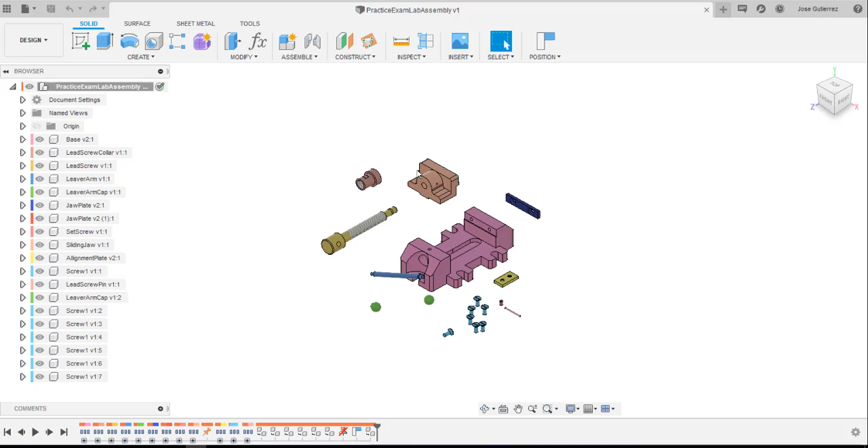So on the exam you're going to get something that looks very similar to this. It's going to be an exploded assembly, and our job will be to assemble it correctly.

If we look at the assignment, I'm not going to give you a whole lot of guidance, so you'll have to use a lot of your intuition. But I will point out specific things that really need to be met. If we take a look at the instructions, we're not given much on how it comes together, but you can at least see where everything goes. I'll give you something like a section view so you can see how the components come together, but you'll see every single component, and then I'm going to clue in on important things.

For example, this vice grip sliding jaw is going to move with the lead screw. The lead screw is going to be rotating and translating through the lead screw collar. That's going to clue us in to how this is assembled.

So let's go through this. The first thing I might want to do is take a look at stuff that is fixed. If I look back here, what I can see is anything that is threaded tightly and screwed in is probably going to be a fixed connection. So I think these plates are probably fixed.

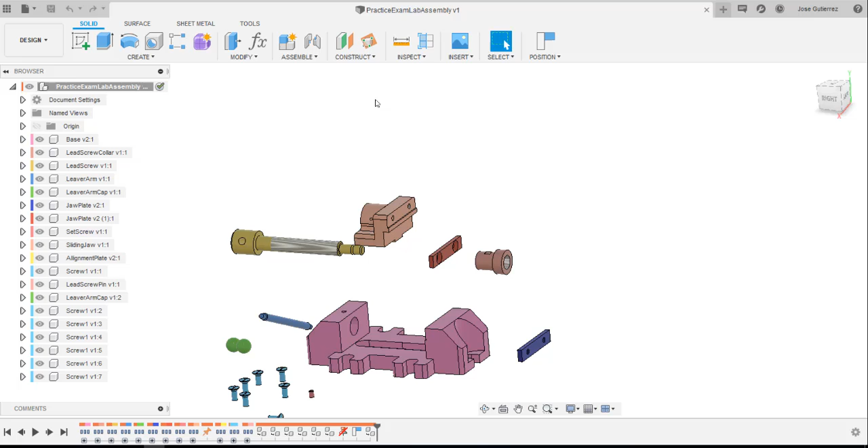So let's go ahead and do all those fixed connections first. I'm going to do J for the joint tool, but just so you know, it lives under the assembly. I just like to do J because I don't have to navigate there.

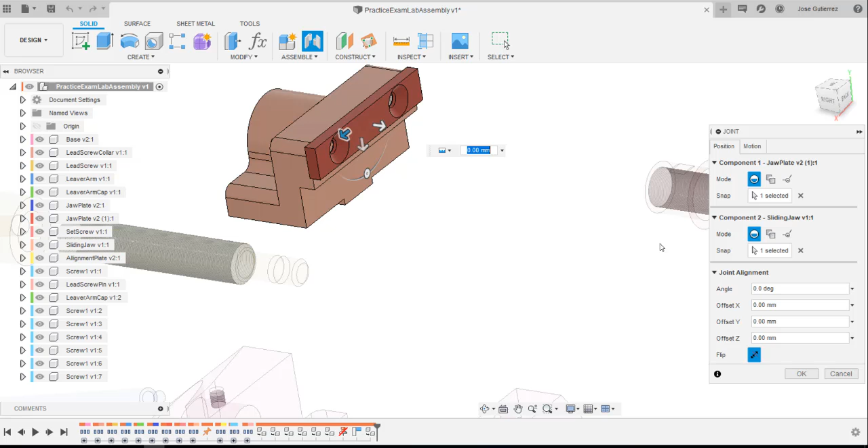Okay, I'm going to first actually just put these plates. It doesn't super much matter the order of operations here, but I'm just going to connect them rigidly to the vice jaw as they would go.

Now technically the bolt's going to make it rigid, so in theory you could do a planar constraint and then a constraint between the bolt and each component, but that's a little bit overkill. So I'm just going to go ahead and put it in as a rigid constraint because I know it's going to be.

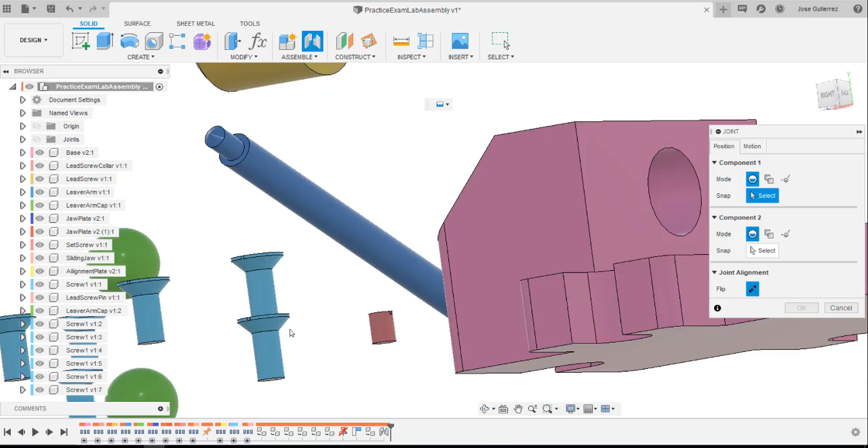I'm going to take this, and in my joint tool, I'm going to actually look at this counterbore or countersink. I'm going to put that right flush with the bottom of the other part of the countersink. Uh-oh, it's going the wrong direction. That's okay, I can just click the flip option.

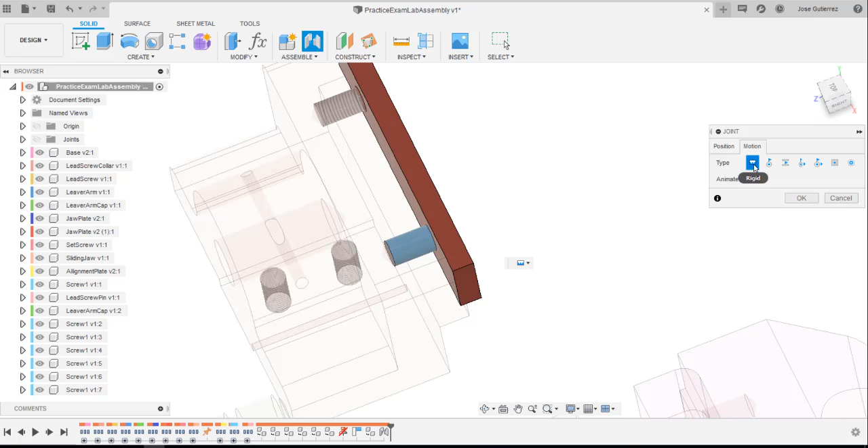Just so you know, the motion I've been doing is rigid. The animation will give you this kind of angry vibrating back and forth motion. Okay, and so that's how I would do it.

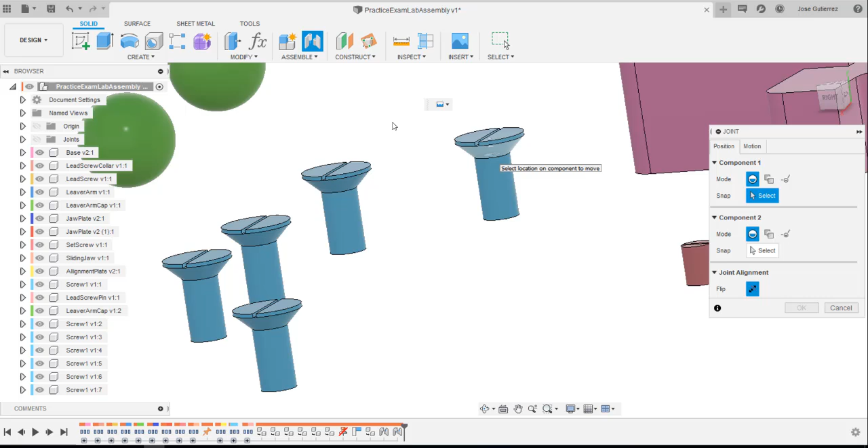I'm going to just continue to go and add all of my joints like so. I'll go ahead and make a joint in between here and here. Feel free to skip ahead in the video if you're like, okay, I understand the screws, but I'll just go ahead and add them all in.

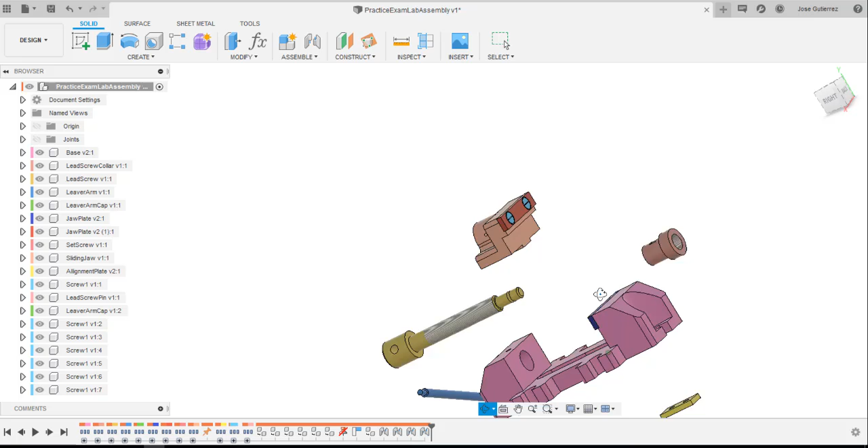That one I didn't have to flip - that's kind of nice. Make another joint between this plate and my base. Oh, and actually, before I go any further, I was told I should ground the base so it can't move. And I don't want it to move.

So I'm going to go ahead and click on the base. I don't want to lose any points, so I make sure I ground that. You should see a little pin next to it, and I can't drag it around, whereas everything else I can drag around. Okay, so I'm going to go ahead and continue on with my joints of my screws.

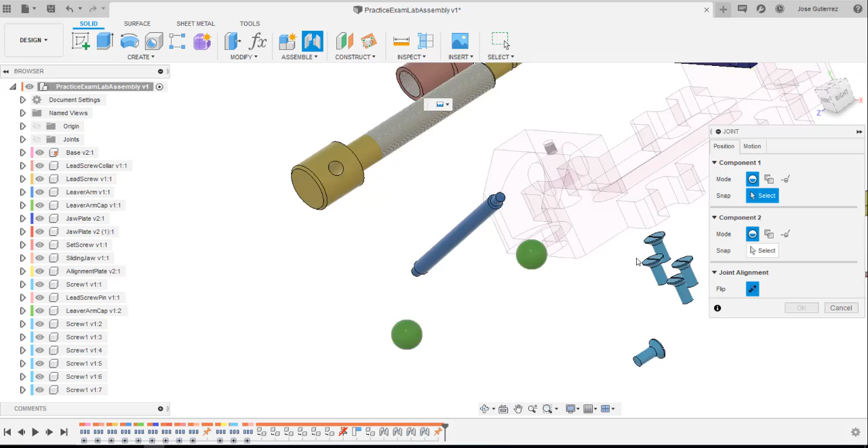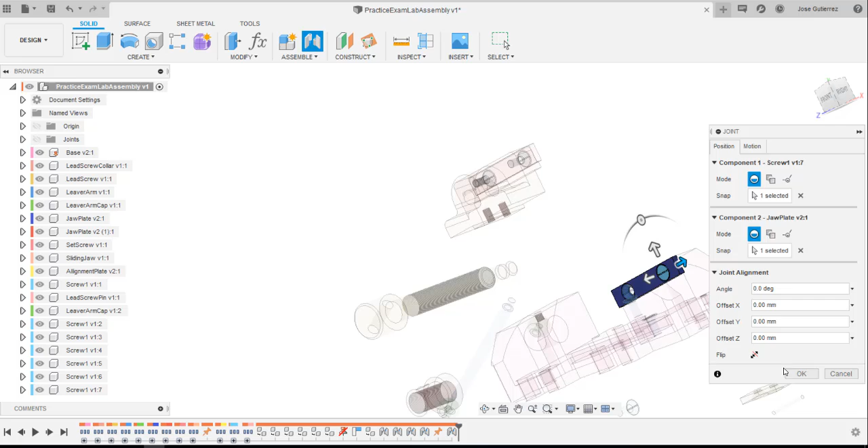Flip that one. Okay, gonna join this screw. Flip that one. Okay, I've also got this little plate right here.

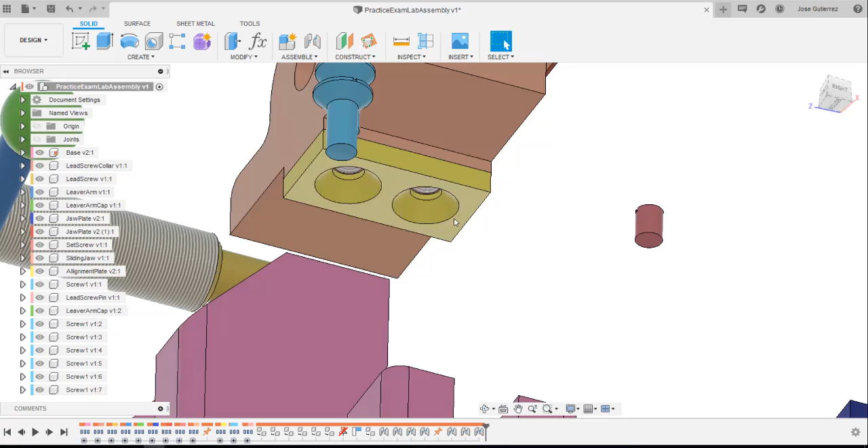In the section view, I can see that it goes to the sliding jaw. I want to make sure my countersink is facing down so that when I put my screws in, it's going to go correctly.

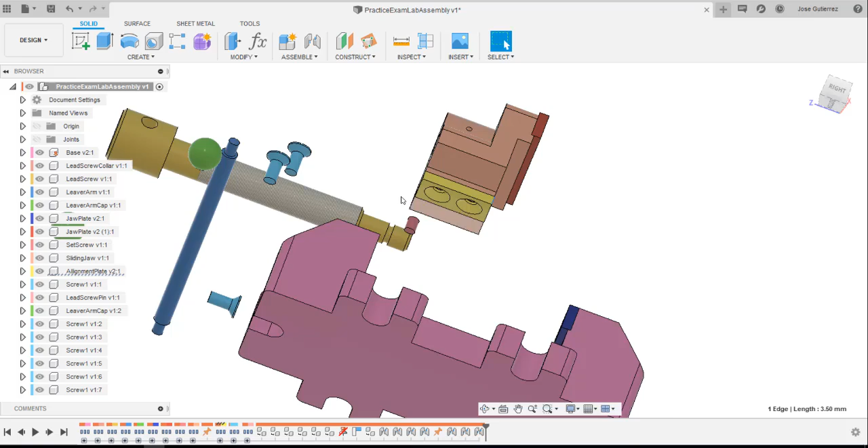Notice that this has actually been modeled with some clearance, some allowance. That is because this is a fixed fastener application. So you would want to control the tolerance of this threaded hole with a projected tolerance through the depth of this part because this is a fixed fastener application. So that gap is by design.

Okay, so I'm going to go ahead and join this here. You can choose that joint origin, that's just as fine too. Flip.

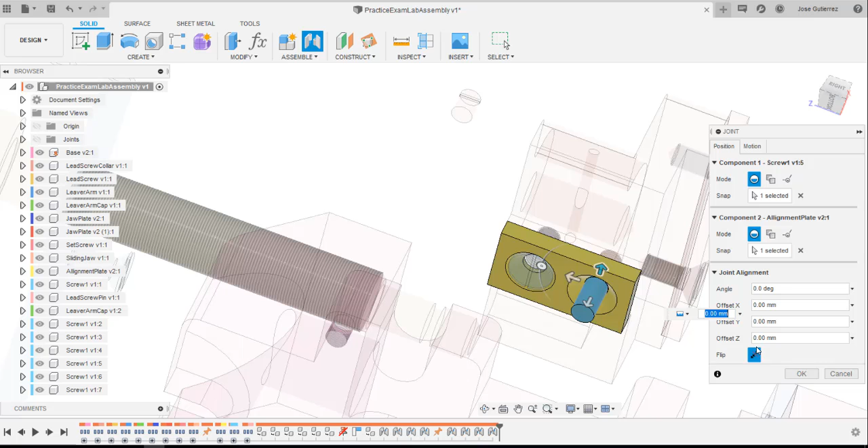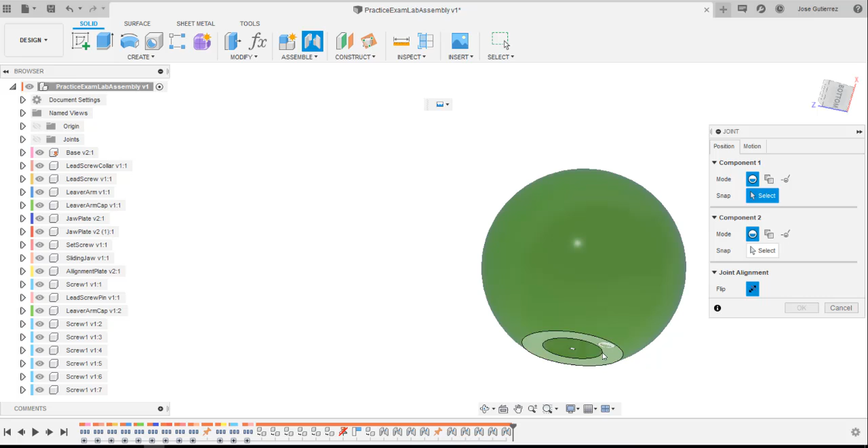Okay, I saw that these balls are going to join to the end cap, so I'm going to hold control. If I hover over that inner surface of the cylinder and hold control, I can select that point. If I don't, I won't get that point, I'll just get the origin. So hover over the surface, hold control, and then I can get that point. I know that's going to go right there.

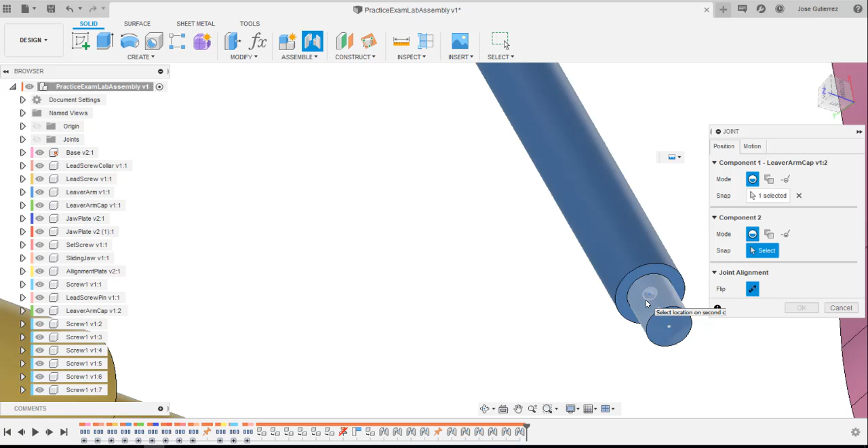That looks nice. I'll repeat that, holding control so I can select that joint origin. Oh, wrong direction, I better flip it. So if I click flip, I can flip that.

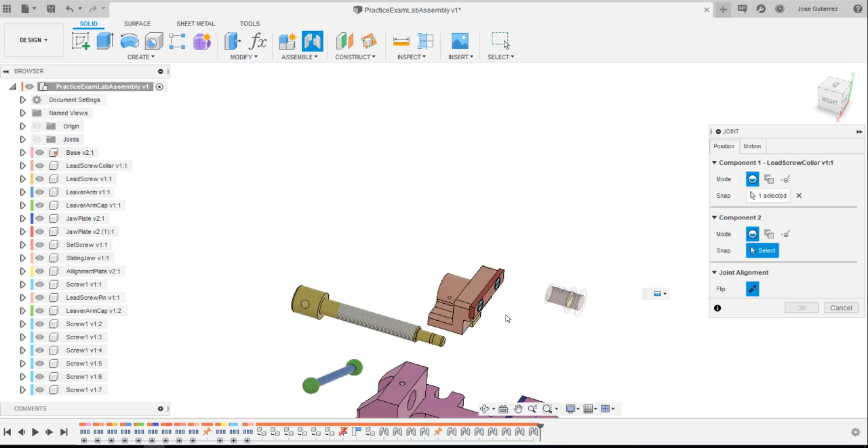Okay, and then I've got a couple more fixed connections. I know that there's a joint between here and my base.

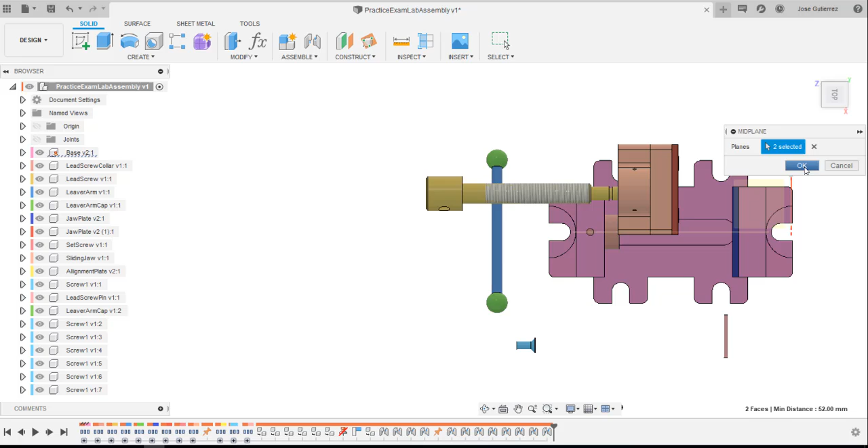I'm actually going to make a construction plane, a mid plane between this face and the corresponding face on the other side. So that mid plane is bisecting my model, because my origin was shifted.

Okay, so I hide my origin. I've actually been hiding my joints because there are so many of them, but you may want to toggle them on and off as needed for clarity. So I'm going to hide them for now.

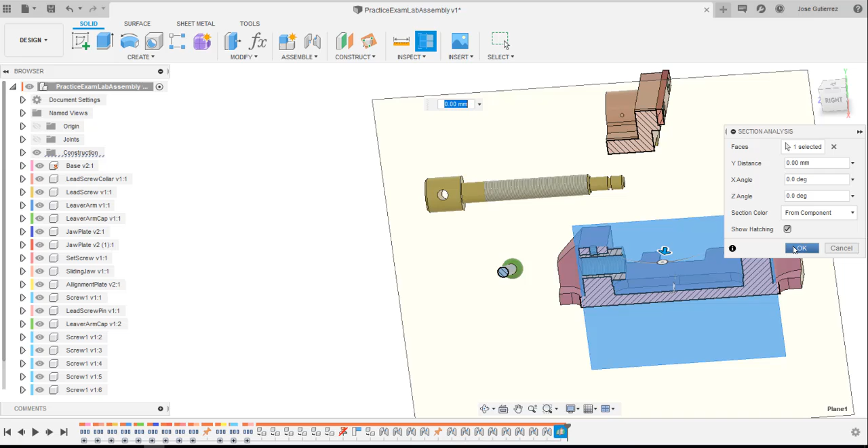I'm going to do a section view, and I'm going to use that construction plane that I just made. And then I'll go ahead and hide my construction. Section views are really helpful for doing these assemblies.

The reason I'm doing it is because I want this threaded hole for the set screw to line up perfectly with that flat part of my collar, and it does. So I'm in good shape here.

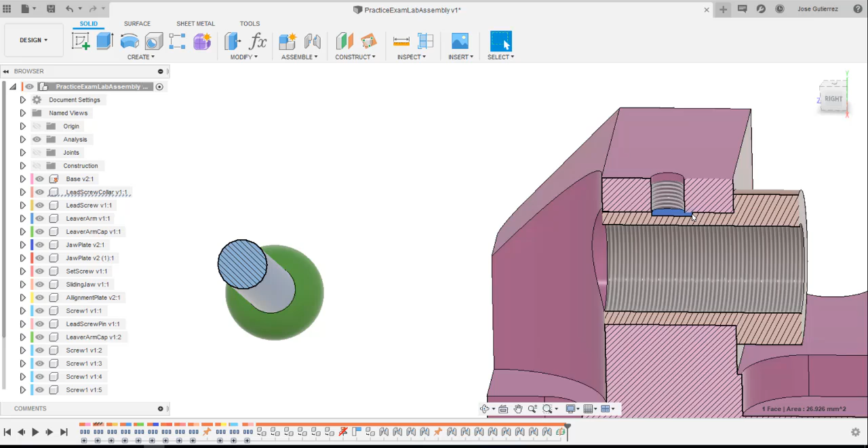But if it didn't, I might have to rotate this joint origin so that it does line up nicely. Okay, so that looks good. I'm going to turn off my analysis, hide my analysis. I'm going to now join that set screw.

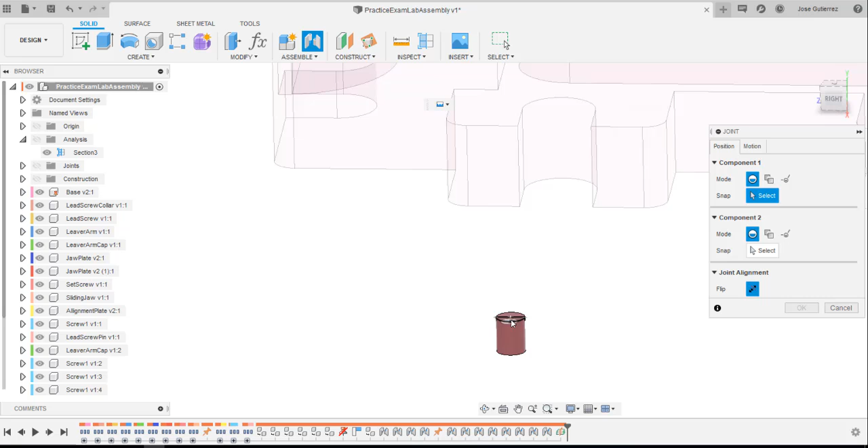So I'm going to join, and I'm actually going to put it all the way into the top right here. Okay, let's just turn back on the analysis and make sure we don't get a conflict. Nope, actually I've got a nice flush face right there. That's great.

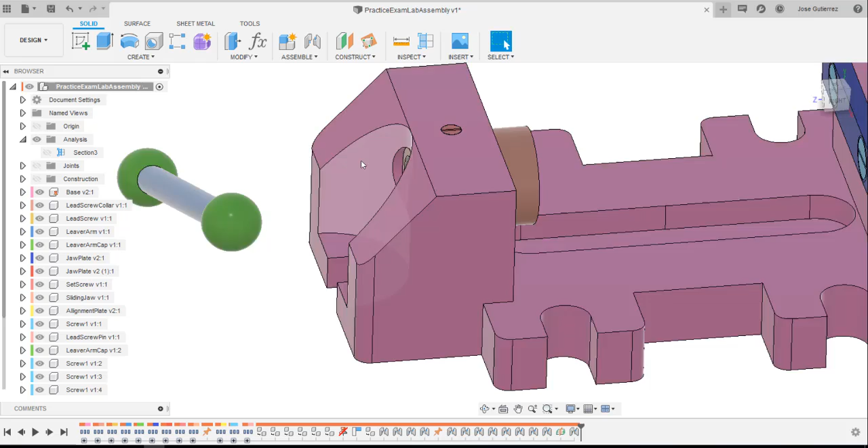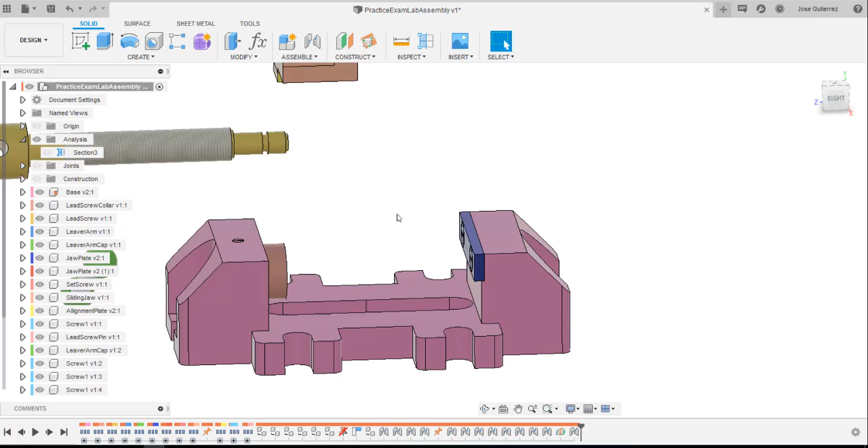Okay, turn off my section view for now. And I've actually finished all of the fixed joints, at least the obvious fixed joints for now. You'll see I don't see any more threaded holes, but looks like there's an extra screw in this assembly. I accidentally put in one too many screws when I was inserting the components, so I apologize about that. I won't give you any extra on the exam, so everything should have a place for the exam.

Okay, so the next thing I need to do is start to do the parts of the assembly that are not going to be a rigid joint. I see that my lead screw is free to slide and rotate. That's going to key me in that the joint origin I'm going to want here is cylindrical.

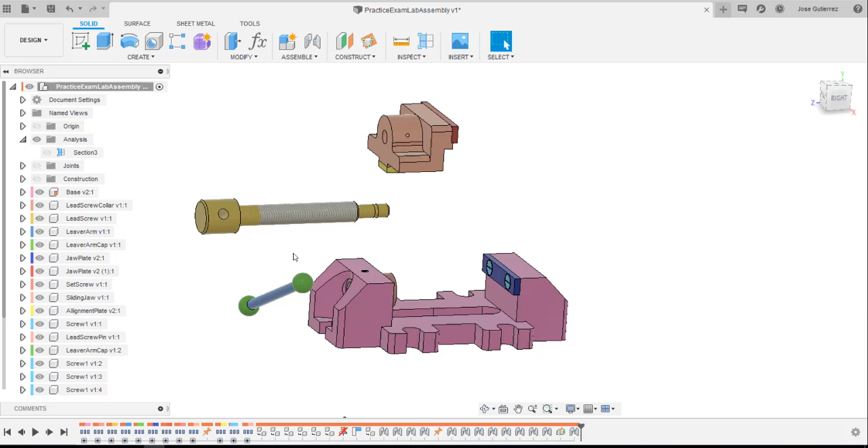So J for my joint. Doesn't really matter the order, but I'm going to do the threads, the male threads of my lead screw, into the female threads of the collar. And so I insert that. Now it's showing the wrong motion.

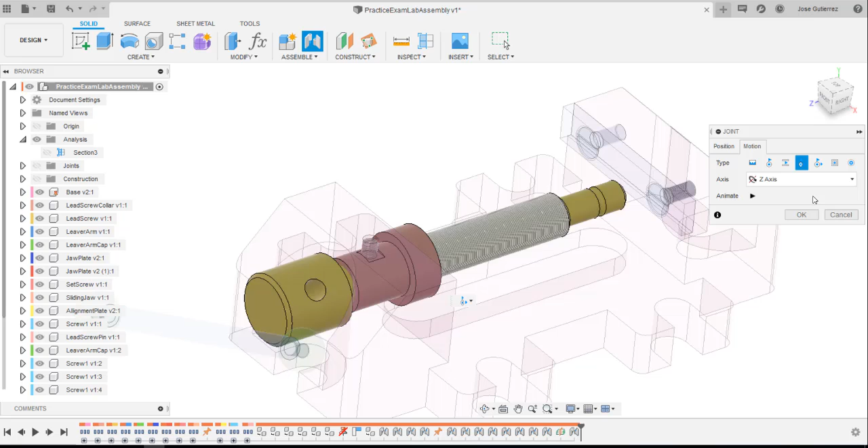So I need to go to motion, and it's not revolute, it's not slider, it's cylindrical. Okay, so that looks good. So now it's free to rotate and slide in the collar.

And then I've got to actually decide how I'm going to join the sliding jaw to this lead screw. And it's not going to be fixed. If you think about fixed, this wouldn't be able to spin without this also spinning. This should actually be free to rotate in it.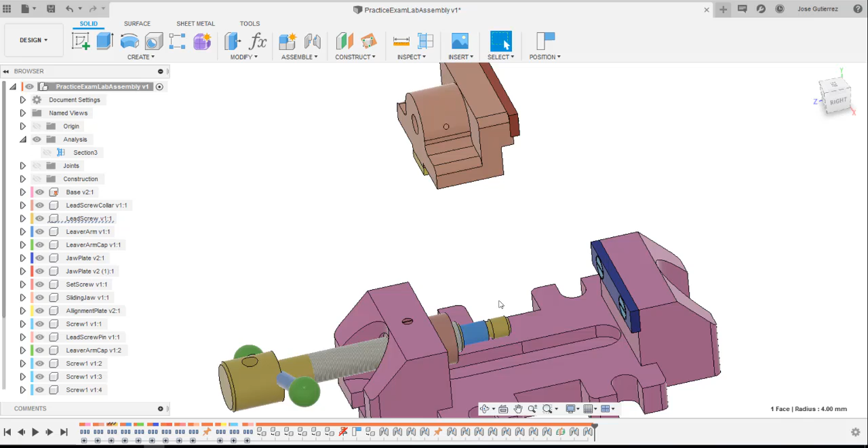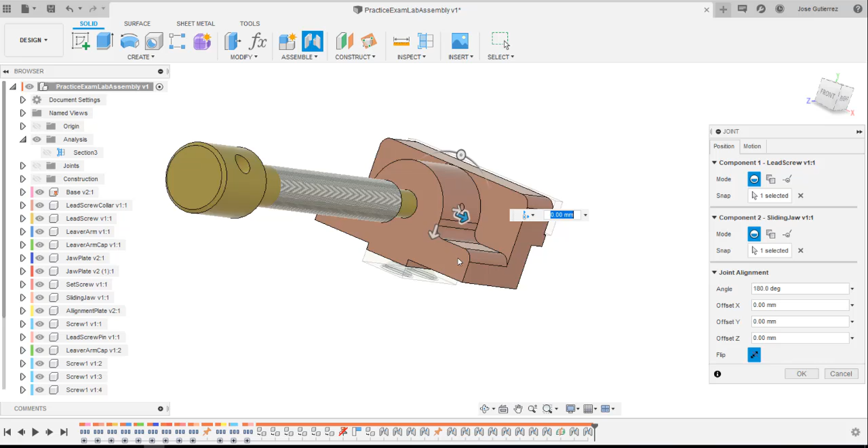So I'm going to go ahead and join, and let's do the end of the lead screw, and let's put it as deep as we can into the hole. So holding control so I can select that joint origin. Okay, and then I'll press OK.

Actually, I'm going to reverse the order. So the first one is here because I want to move it to the lead screw. If you select that one first, it'll move it to there.

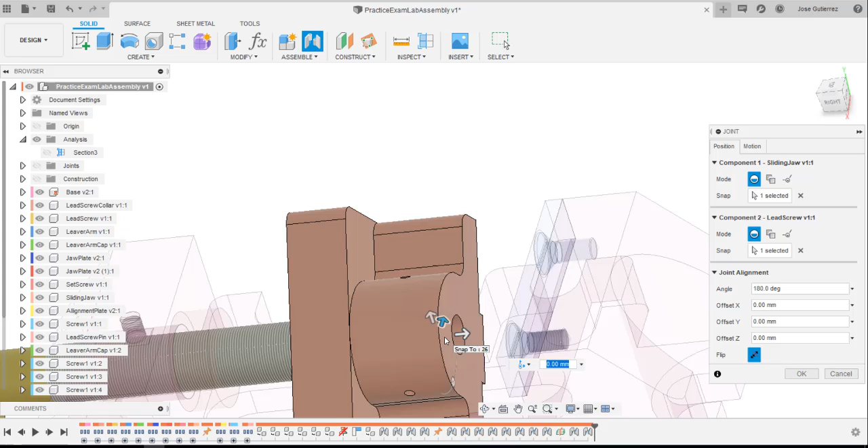I'm going to flip the direction, but then I'm going to change the motion to a revolute. Okay, so now it's free to spin. I'm also going to use my section analysis, so I'm going to turn that on before I move on with this joint.

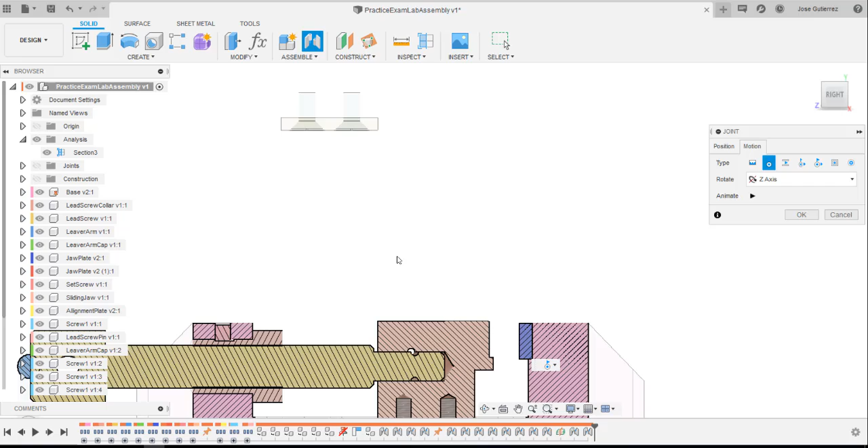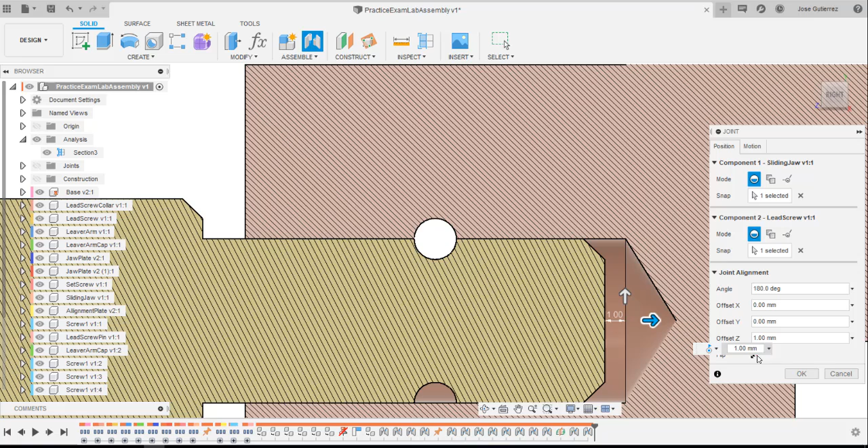What I noticed when I turned on my section analysis is that the hole for the pin that's going to go through here, they don't match, and it needs to match. So what I'm going to do is move my joint origin, so I can just drag it into place. And now they're aligning nicely. Okay, so now my revolute joint looks good.

Turn back off my section analysis. And what I notice is as I spin this, my sliding jaw is rotating, and that's because I haven't fully constrained it yet. There's actually another constraint: this face should not be lifting off of that face.

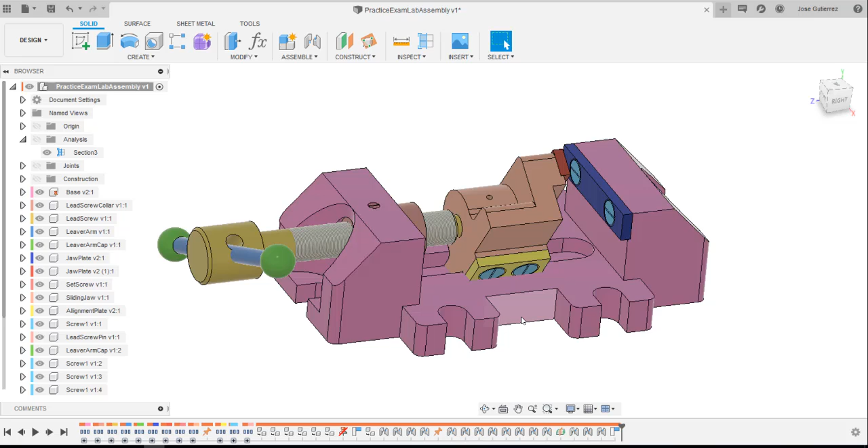So I need to apply a constraint, so I'm going to do joint. If I look at the motions, it's not rigid because it needs to slide back and forth. It's not revolute. Potentially you could use slider, so I could slide this in there.

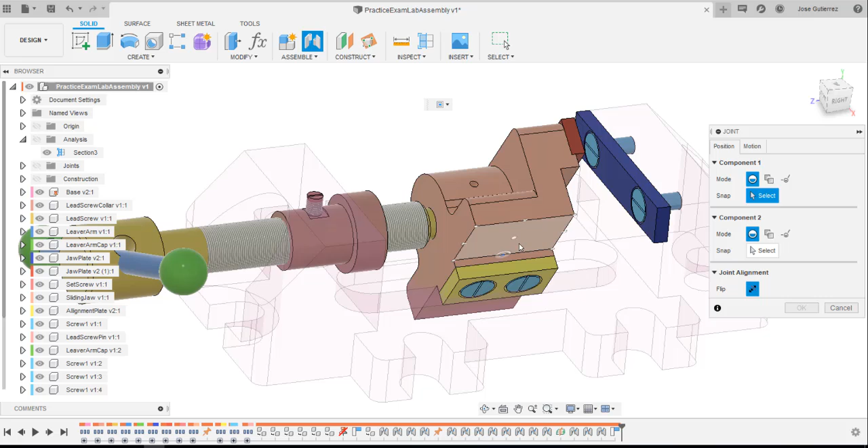I'm actually just going to go ahead and do planar, and I'm going to select this face. It's going to want an origin, so you have to select, hover and select an origin. It's kind of arbitrary, but we're choosing planar as our motion. And so now, as I spin this, it's not allowed to move off that face.

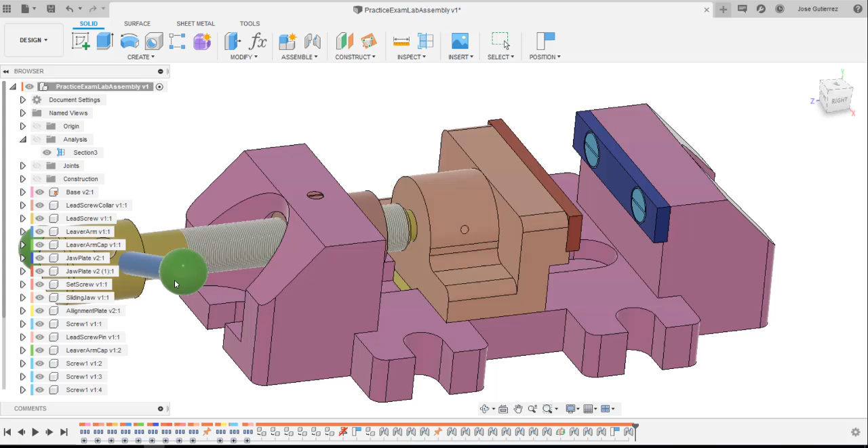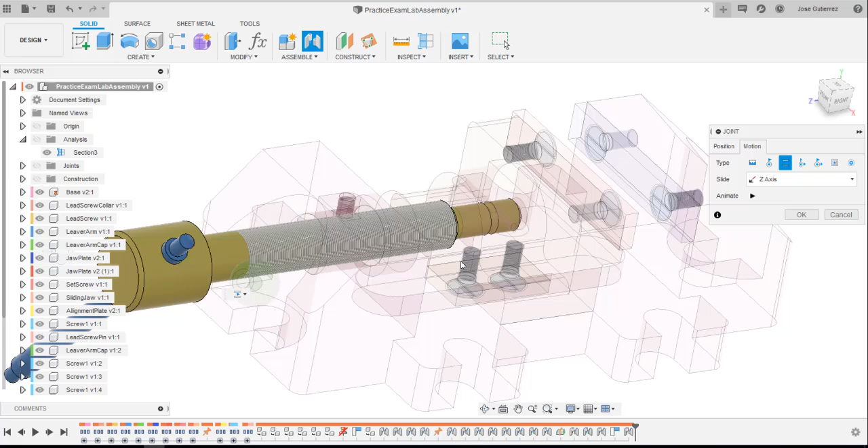Do some more joints, and I'm going to go ahead and join this shaft in here. I could do cylindrical, but I'm just going to do slider. Technically cylindrical would work, but I'm just going to make it a little bit simpler on my assembly. Sliding will get the same effect here. So now I can slide that back and forth.

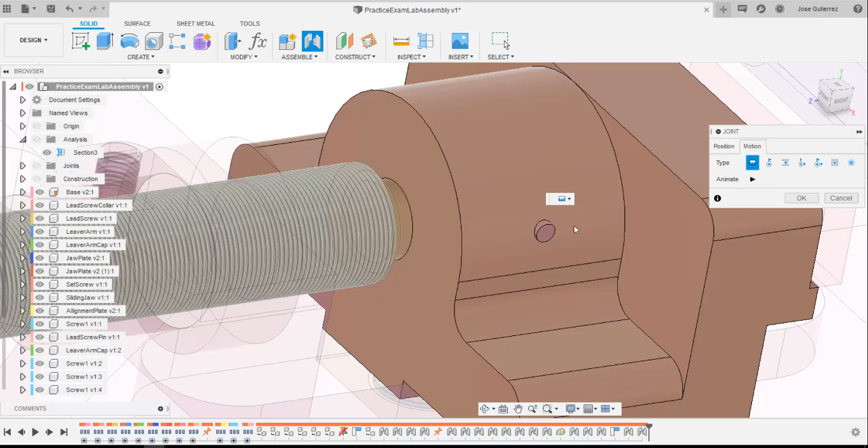And the very last thing I need is this lead screw pin here. So I'm going to join that to the midpoint right there. I held control to get that. This might be a press fit. Slider would work, and I would accept slider, but I'm just going to go ahead and go rigid because that's just going to be a press fit.

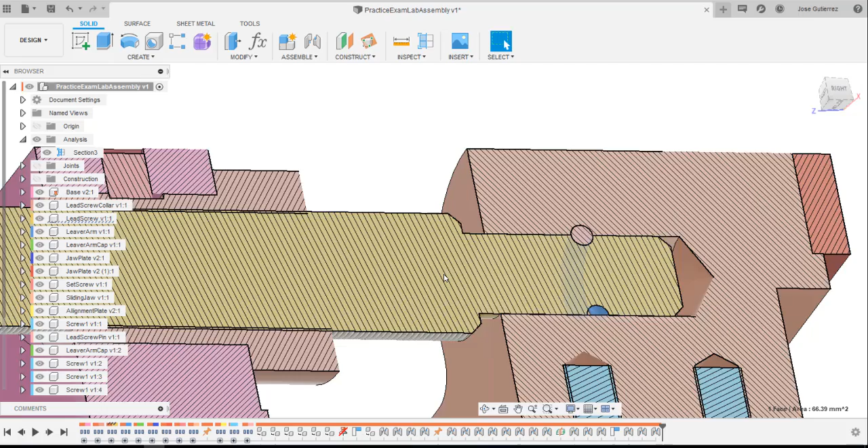So if I look back on my section analysis, what that is doing is it's going to allow this lead screw to spin, and this groove is going to hold it in place so that the sliding jaw has to move back and forth, advance back and forth with the advancement of the lead screw. So kind of a clever mechanism there.

Okay, all right. Everything is assembled and joined, except for this screw. So sorry about that, but it looks like we've added all of our joints. What we haven't added is that this can have a conflict here. We don't like those conflicts.

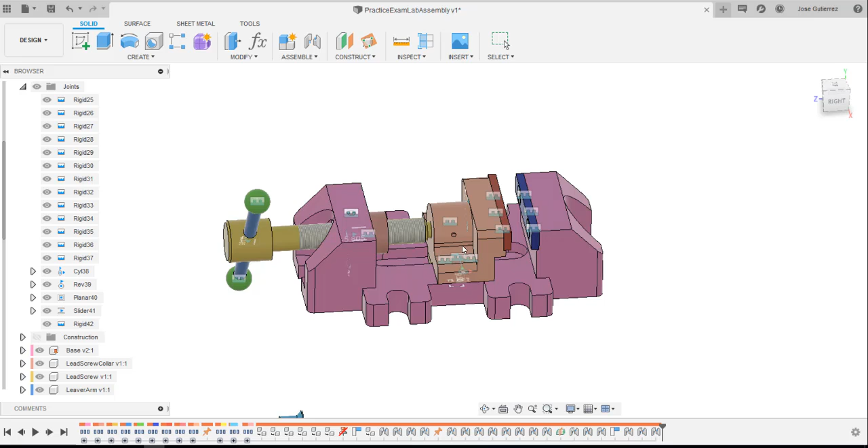So I'm going to go back, and we saw that we are also supposed to do something where our model functions mechanically like it would in real life. So we know that the lead screw should translate 0.5 millimeters for every 360 degrees, or every full revolution the lead screw makes. So let's go ahead and add that in right now as an assembly, and that's going to be a motion link.

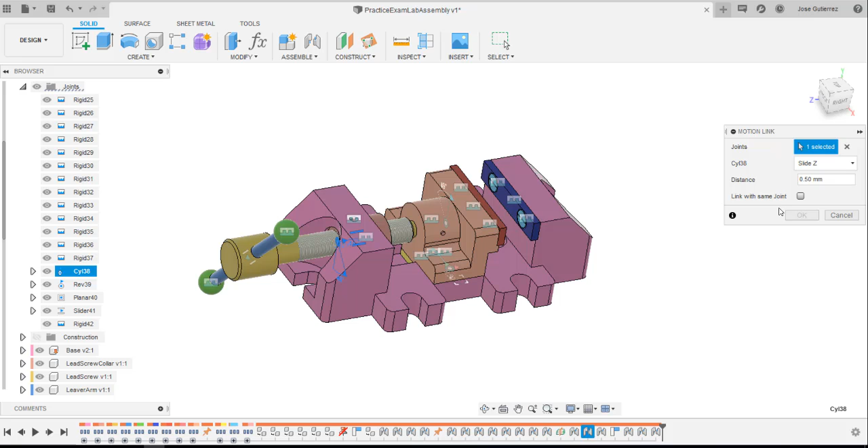The link could be between this cylindrical joint, and I could actually do the same joint. So it's going to go half a millimeter, and I had to type in 0.5 for every 360 degrees it rotates. Now I'm going to drive this joint.

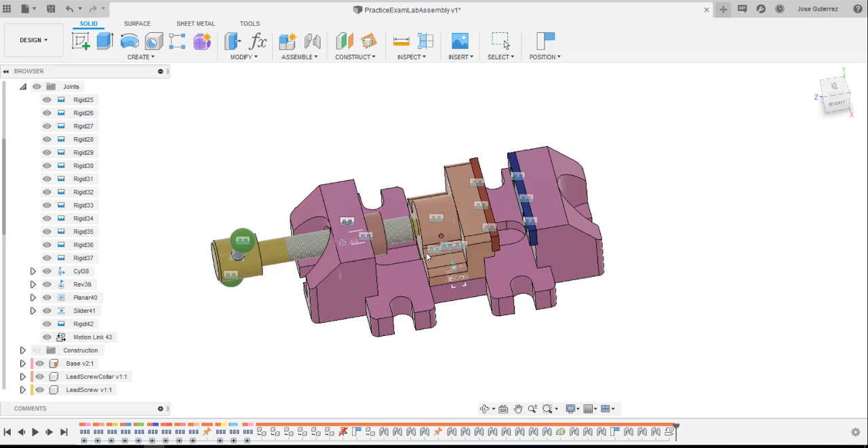One thing you'll notice here is like when I added that, I'm not actually able to freely move this around. It's kind of a little bit hard. That's because the rotation of this has been linked to the advancement. So it might be a little bit easier to drive this joint. So if I drive it, let's see if it looks correct.

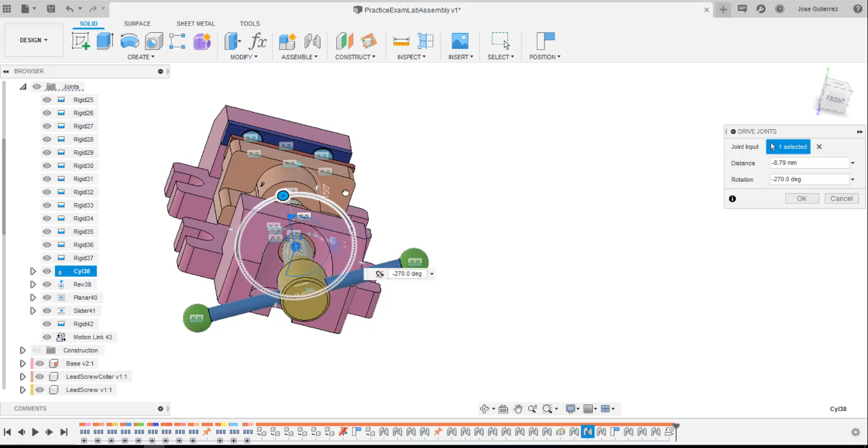So we know that if we're threading the screw clockwise, that's like tightening a screw, so it should be advancing it. And it looks like that's correct. As I go to the right, it's advancing it. So that's good, so we've chosen the right direction. Otherwise, we just need to flip that relationship. Okay.

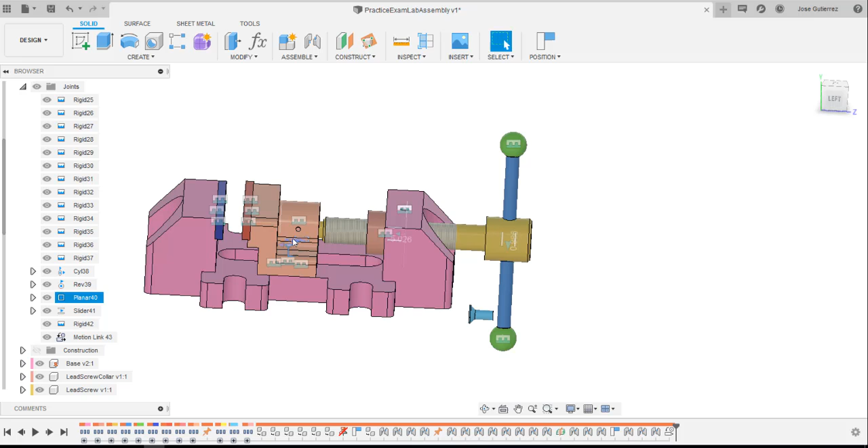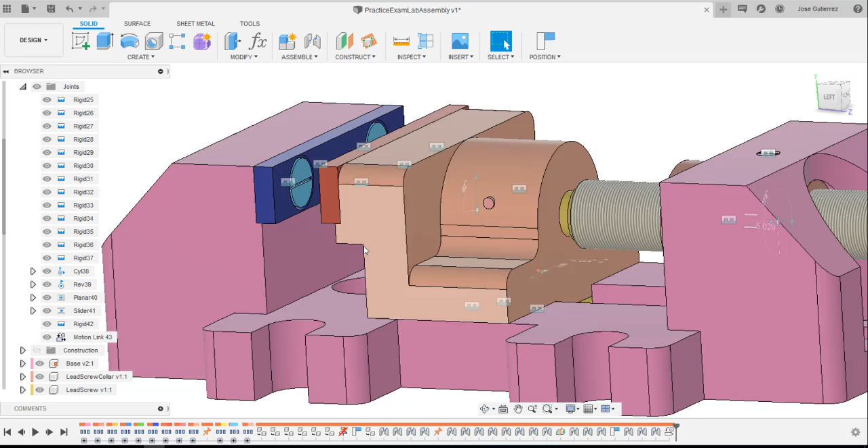And then what I need to do is set up a joint limit. So to do that, I'm going to go ahead and align the faces to see where the limits are going to be. So I'm going to align between these components, align between this face and that face. Click OK. And it's not doing it. I'm like, what is going on? Remember that when we added this motion link, it kind of constrained things for us.

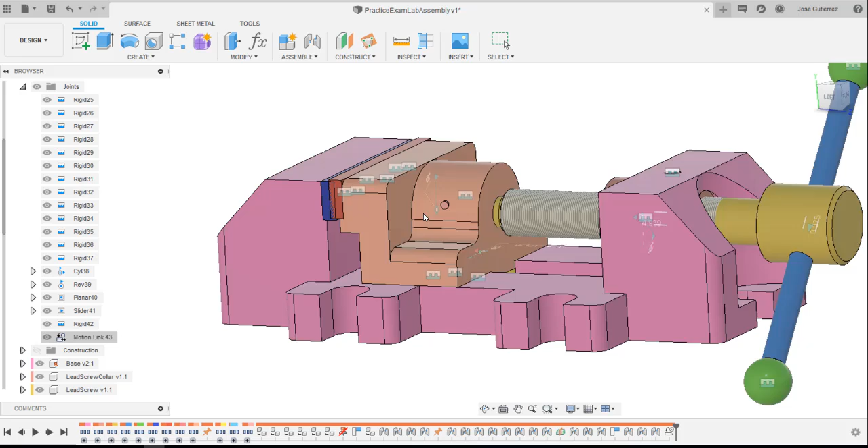I'm going to, for now, suppress this feature. So if you right click on it you can unsuppress it, but you can just suppress it for now. So it's not acting right now. When it's suppressed, then it's going to make my alignment a little bit easier. So I go back to my modify and align, and I'm going to basically align these two faces.

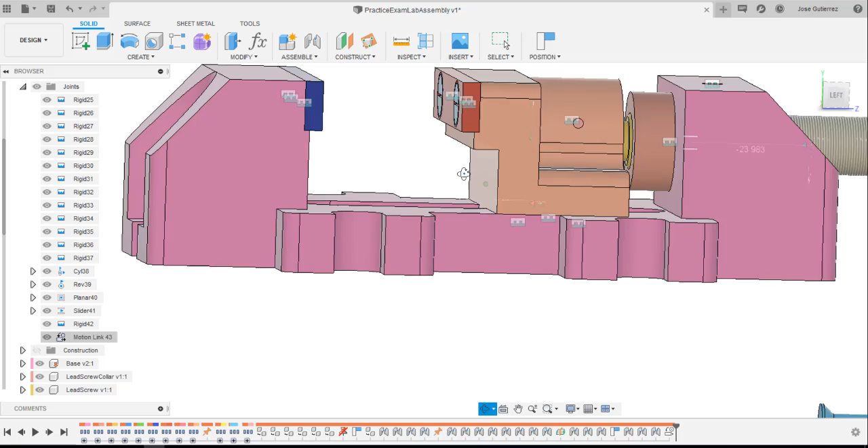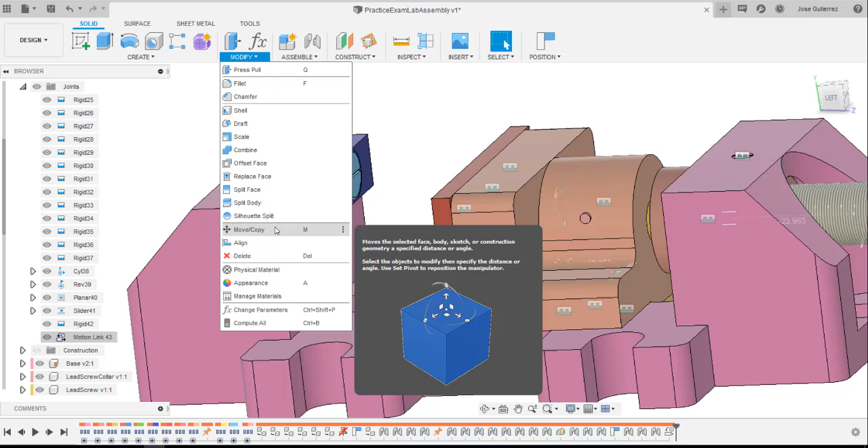Oops, that didn't work. I forgot that the base here is grounded, and since this is rigidly fixed, this isn't allowed to move. So the order of operations matters on the align tool - first you want to select the from and then the to. I'm glad I did that wrong so we can see it. I need to select this one first and then align it to that face.

Now I can look at my cylindrical joint. I can click on that and actually drive the joint. If I drive the joint, I see that its position is 3.52. So I might just write that down on a piece of paper right next to my exam - 3.52, I'll write that down.

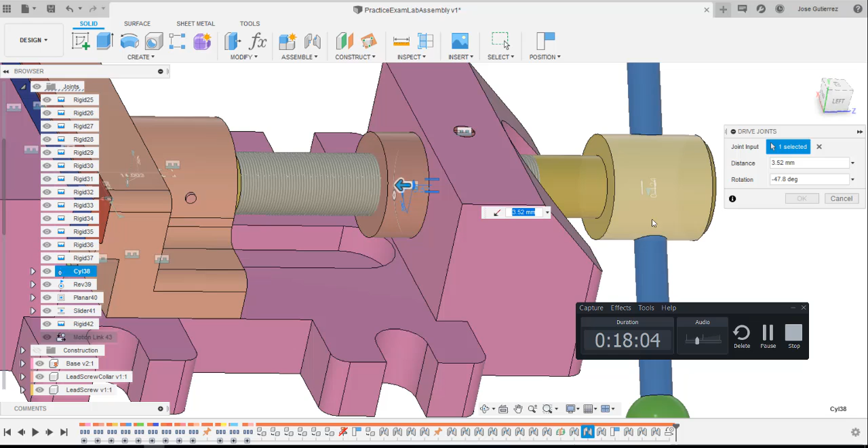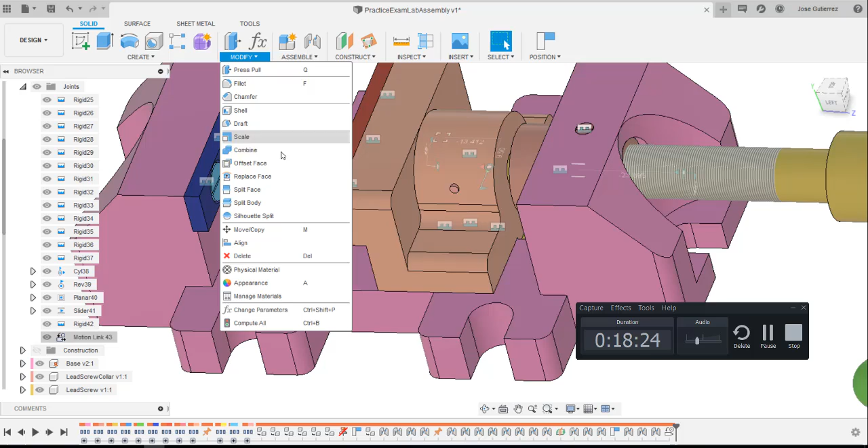Now I'm going to do another alignment. The limit of where this would stop going through here is if these two faces are aligned. So I can repeat the align tool - oh, not the drive joint. So go to modify, align, and then I want to move from this face to that face.

If I look at that position, I can see it kind of easily. It's negative 26.48, so negative 26.482. Those are going to be my joint limits.

To enable those, I'm going to go back to my cylindrical, and then edit joint limits. The minimum should be the negative number, so negative 26.482, and then I wrote down my maximum was 3.52. Now let me see, did that enable?

Oh, my motion was wrong. That didn't work, so I'm actually glad I made that mistake because it points out a mistake you might make. I go back to edit joint limits - I need to cancel. So on my cylindrical, I'm going to go to edit joint limits again.

I need to change the motion. I was going a little too fast to slide - so actually that's rotate, I'm going to undo those limits, because it's the slide that needs to be negative 26.482, and then my maximum being that 3.52. It should have keyed me in because the other one had the wrong units.

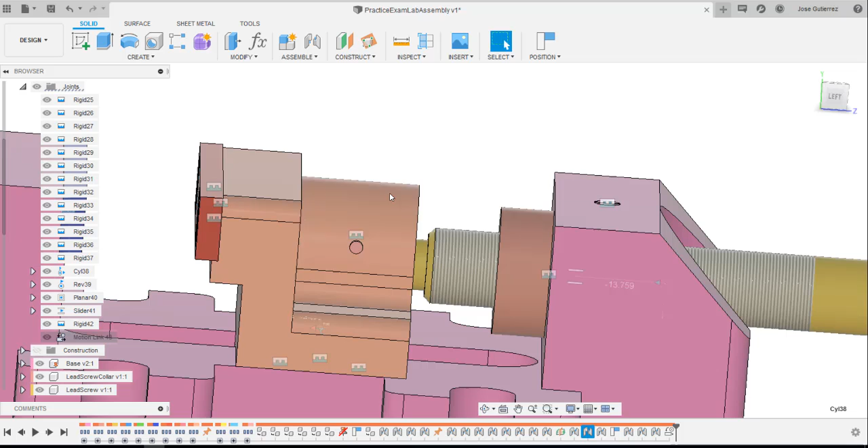Okay, so now when I move this back and forth, I can't move it past that. And it looks like I might have got my negative one wrong - did I type it in wrong? So on my cylindrical - I did, I typed in 25 and not 26.

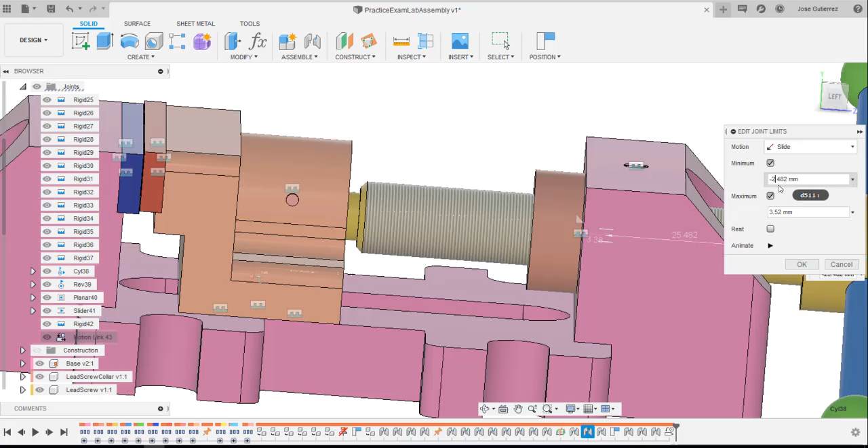Okay, so now I'm actually simulating the joint limits. Do not, whatever you do, contact sets - it'll crash your Fusion. Okay, so now I'm going to also put the motion limit on this so that it can't translate out.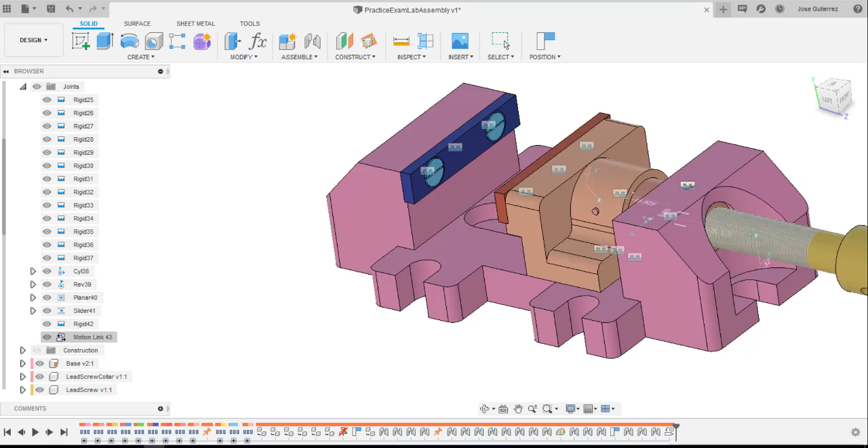The align is going to be a little bit harder to do on this one because it's like a weird tangency face here. So I'm going to say, at least for this exam, as long as you get it close enough - I'm going to come in and say, oh, that's pretty close. So I got 29.661, I'm going to go with 30.

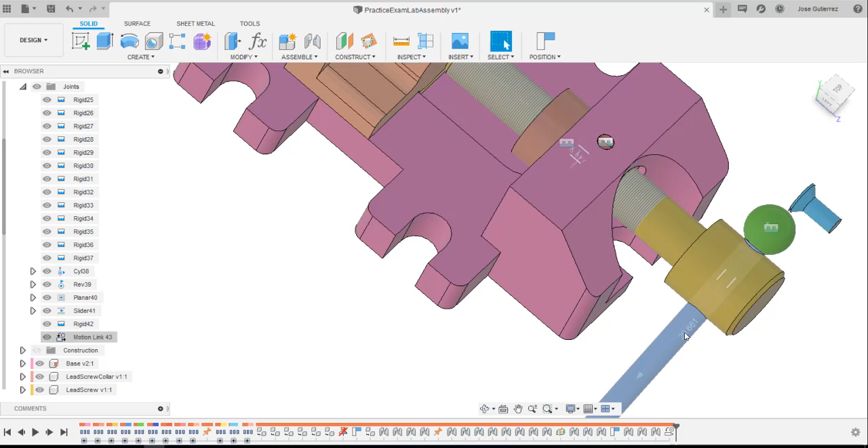And then if I go the other way, oh, it's about negative 30. Okay, so it looks like negative 30 to 30.

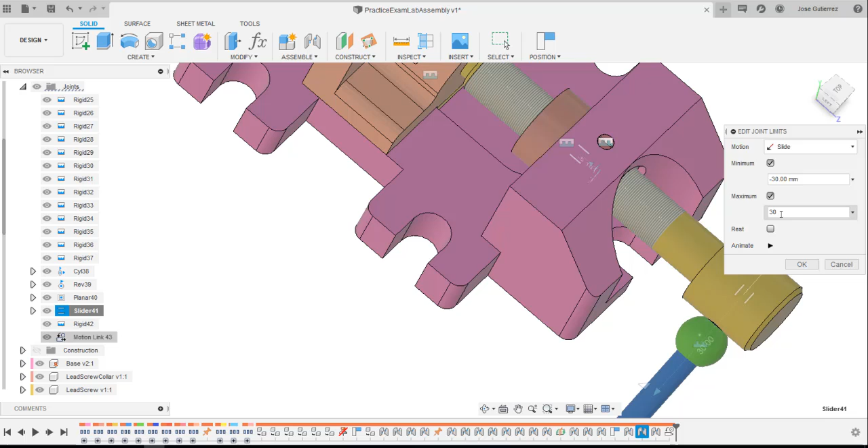So on that slider joint, edit joint limits - the motion, there's only one motion for a slider, but minimum will be negative 30, and then we'll set our maximum to 30. Okay, so now we can move it back and forth.

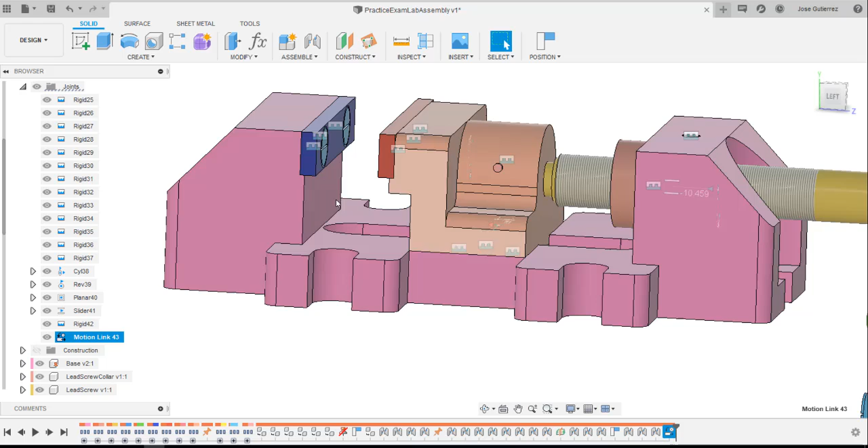So it's simulating where the end caps would limit it from going through our lead screw. Now I'm going to unsuppress my joint link, my motion link. And actually, I've fully done it except for this annoying screw right there.

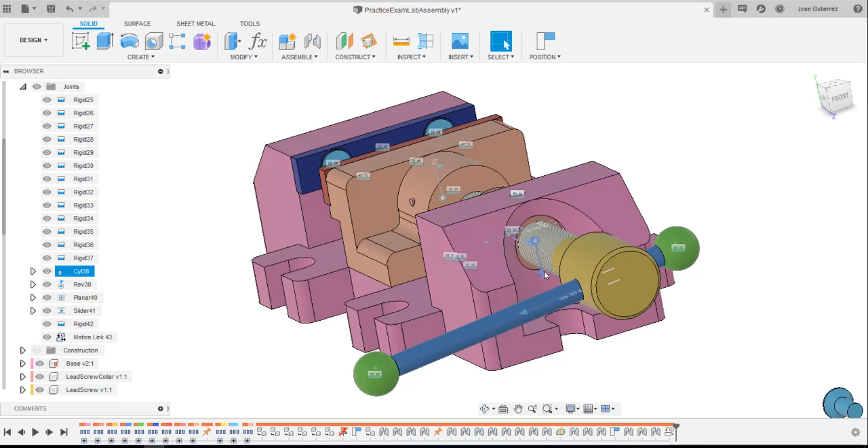So now, as you rotate this, it's kind of hard to do because it's sliding here - it actually does move, but it's a little bit hard to freely do it. So I might just go ahead and drive my joint just to make sure it has the motion I want. As I rotate this, okay, that's good. Or even if I translate this, what you see is, as I rotate that, it's translating.

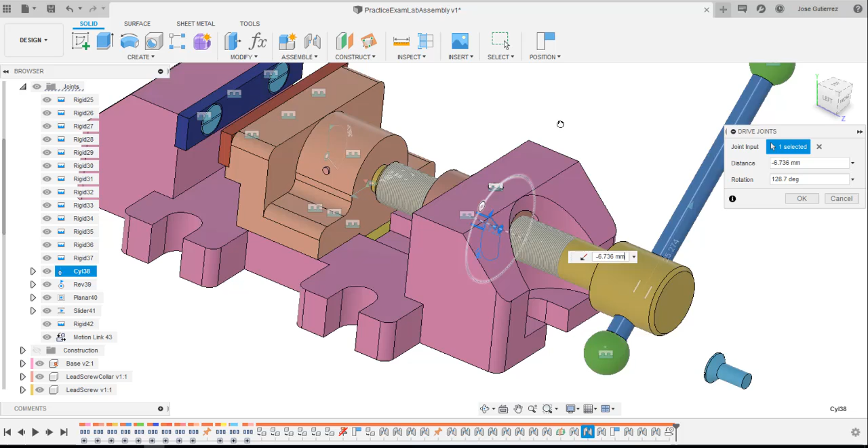That looks good. Okay, so looking over, I'm going to review this one more time. I've grounded the base, this piece moves with the lead screw, I've got this rotation and translation, and I've got this sliding down. Let's take one more look at our section view just to make sure, double check that.

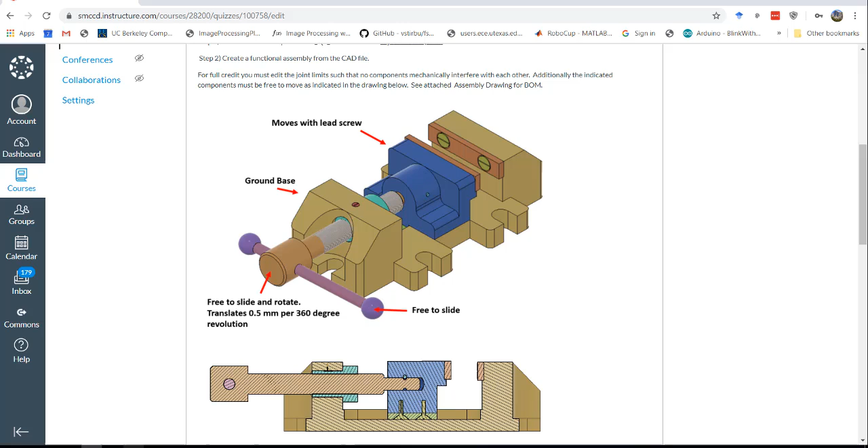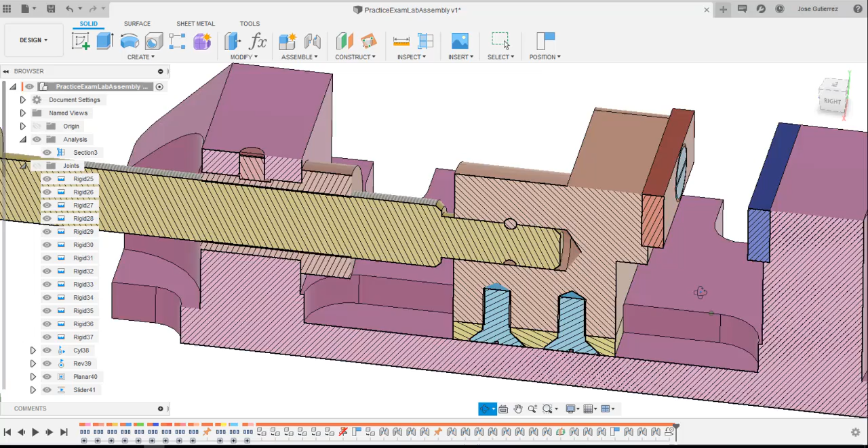I think I'm ready to submit it, so I'd save it into my exam folder. Okay, hopefully you found this video helpful.